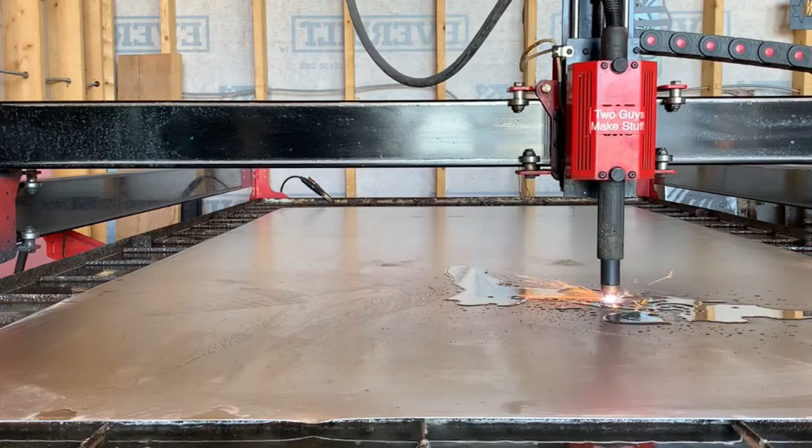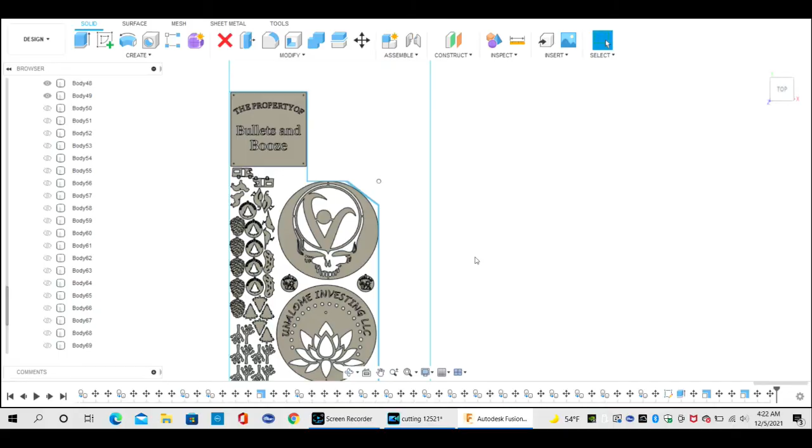And don't be alarmed, that was not a real goldfish swimming in the table. That's what we in the business like to call a special effect. But anyway, back to the video.

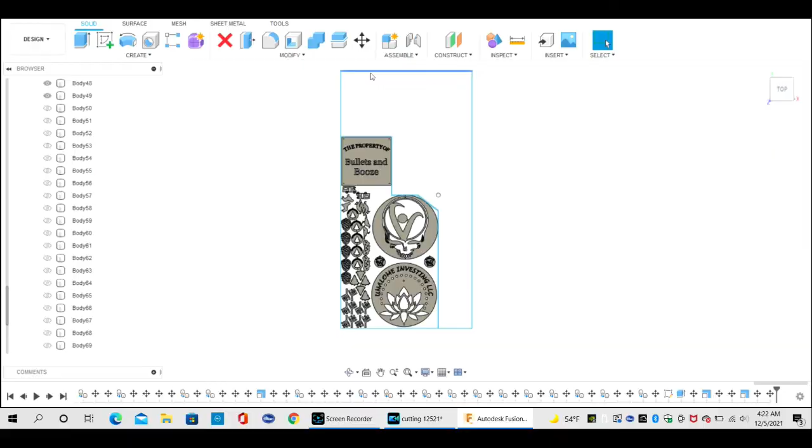Okay, so here's a two guys top tip. When you're setting up your cut, draw the size of the sheet that you're cutting it out of. And then once you have that drawn up, you move your pieces or you nest your pieces to the sheet, to the size that you want. You can see here, that's a 4x8 sheet, so that's 4 foot, that's 8 foot, 4 foot.

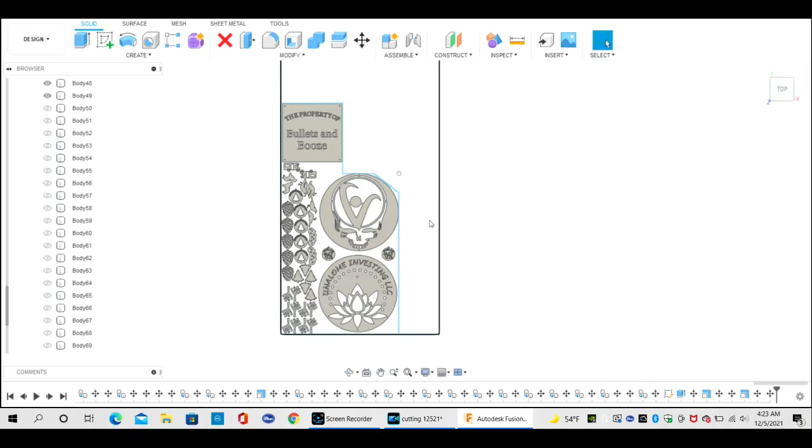And then once your pieces are on there, I also draw in a cut line so we can cut the cutout pieces out. And that way we know what the size of the leftover sheet is, and we have a digital record of it. So if we need to cut something else out, we can import those pieces into that sheet like this and use the leftover sheet to make subsequent cuts.

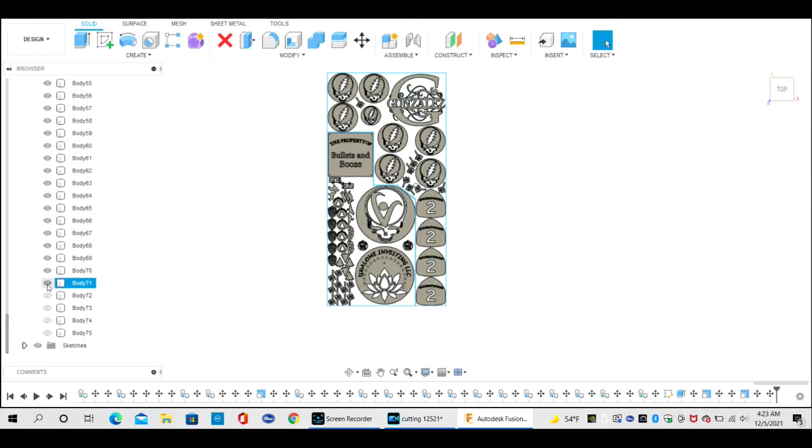It makes it really nice. We use all the material that we have in the shop, and it makes it so easy that if you want to make a second cut or on a different day, we already have the file and the size of the piece that we're going to add these cuts to. So there it is. We have the whole sheet that we get to cut out.

So this is a sheet of 16 gauge and the machine's cutting it at 200 inches a minute, 78 volts on the torch height control at 45 amps. And we're not going to show the whole cut, but it cut a good portion of the sheet, about half of it, and it took an hour and a half to complete the entire cut.

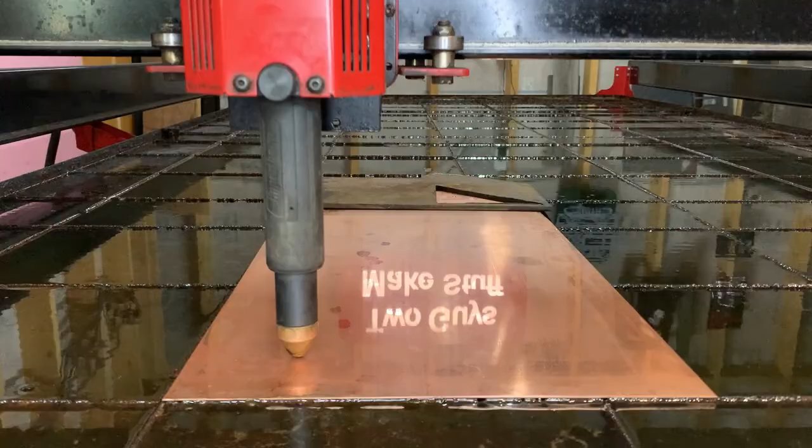So this was a fun one. This is a piece of 16 gauge copper. We had this custom order from a friend of ours on Instagram. And the thing about copper is there's no settings for copper. So we had to do some experimenting and come up with the settings to cut this. And it cut really nice.

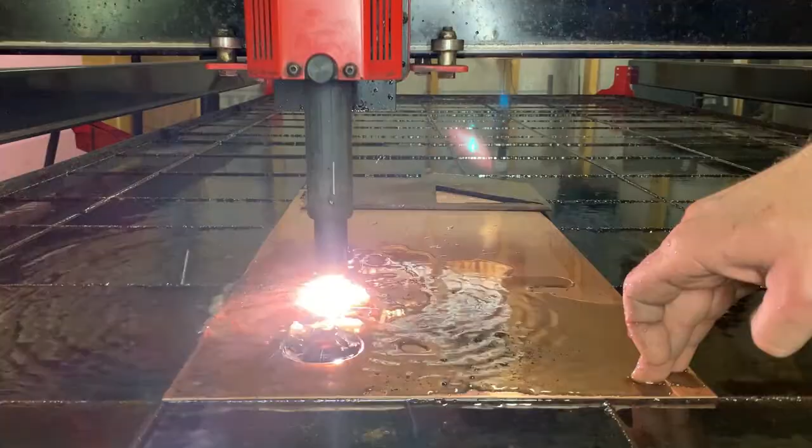Now we'd cut copper before, we just had never cut 16 gauge. So it was a little bit of a challenge, but it was something that we really enjoyed doing, and it came out really nice.

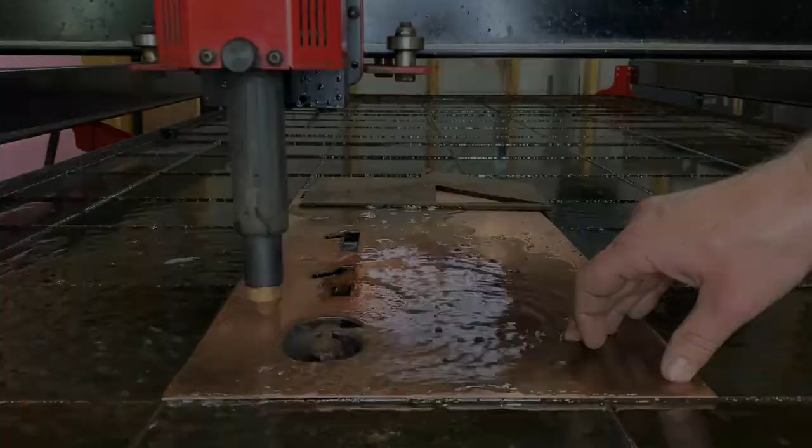So here's another example of setting up the sheet of the piece that you're going to cut out of. This was a 4x4 piece, and we nested these hangers to cut these out. And because we had that digital copy and we knew where the other pieces had already been cut out, it's really easy for us to go back, add more pieces to the sheet. We know where the cutouts already were. And once we did that, then we just proceeded with cutting out another 7 of these hangers for a different customer. Works out really good.

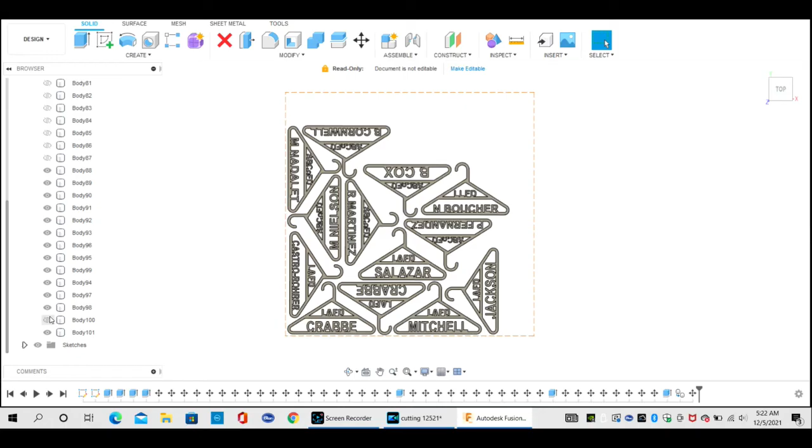And now here's the machine going to work cutting those hangers. Now this is 10 gauge, so it cuts it at 129 inches a minute, 128 volts on the torch height control, and at 45 amps on the machine. And it does a really nice job. Super clean cuts with these standard cut consumables.